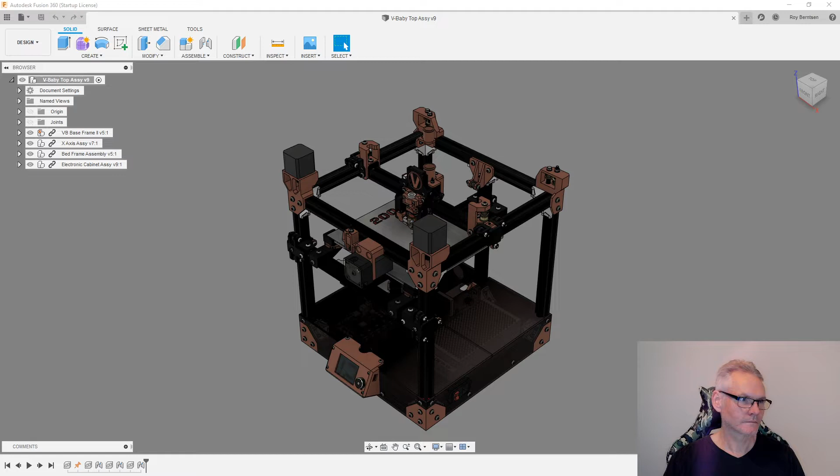Okay guys, the V-Baby squad.

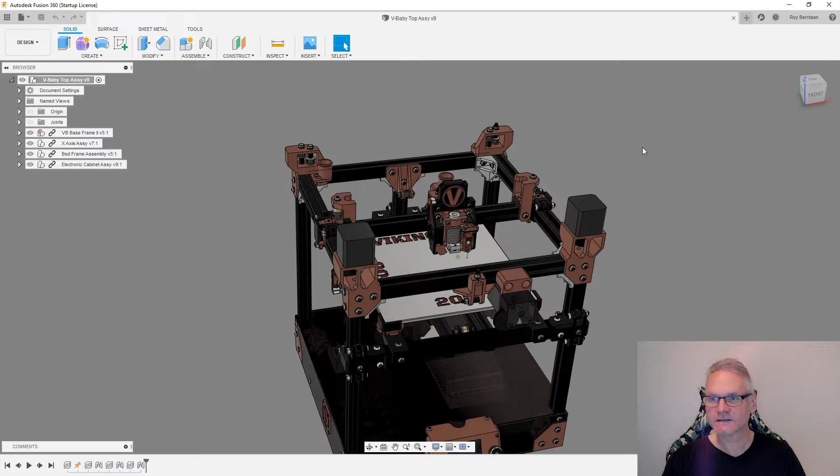Before I start the assembly video for the V-Baby, the X-axis, the X carrier and also the Y carriers, I will make some small changes to the layer fan shrouds. Just a small improvement, which one of you guys pointed out we could have.

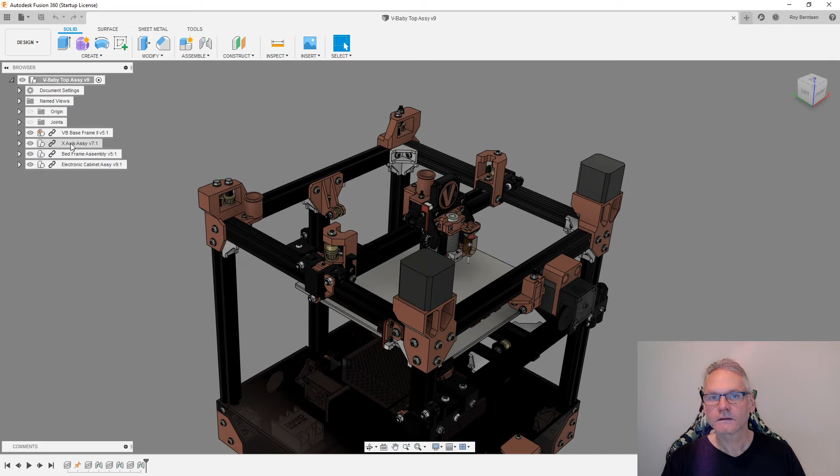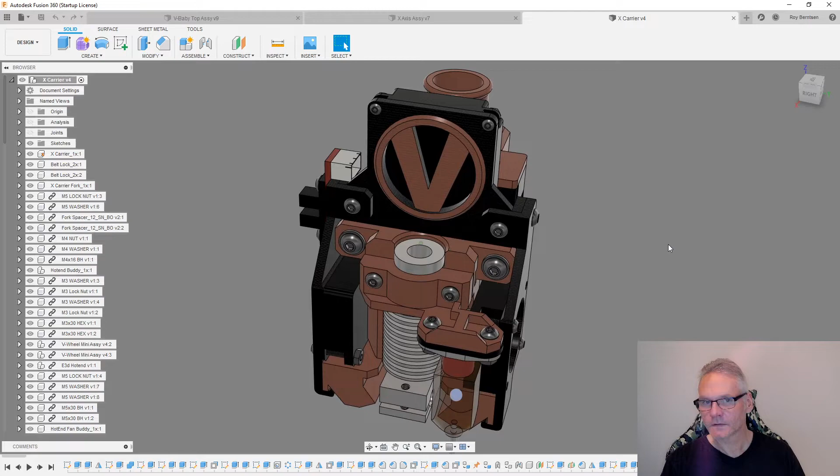I'm gonna show you, it's easier to show than to try to explain, so bear with me. I'm just gonna open the X-axis assembly, and then I'm gonna open the X carrier assembly, and I'm gonna work here.

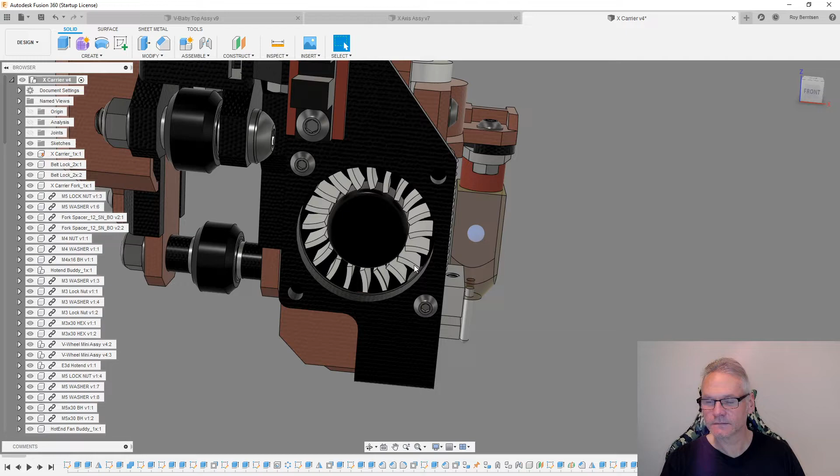What I want to do is add something here so we don't squeeze this fan when we mount it. Squeezing it will restrict the fan from spinning, so we don't want that. So I'm gonna add something here so we don't get any squeezing.

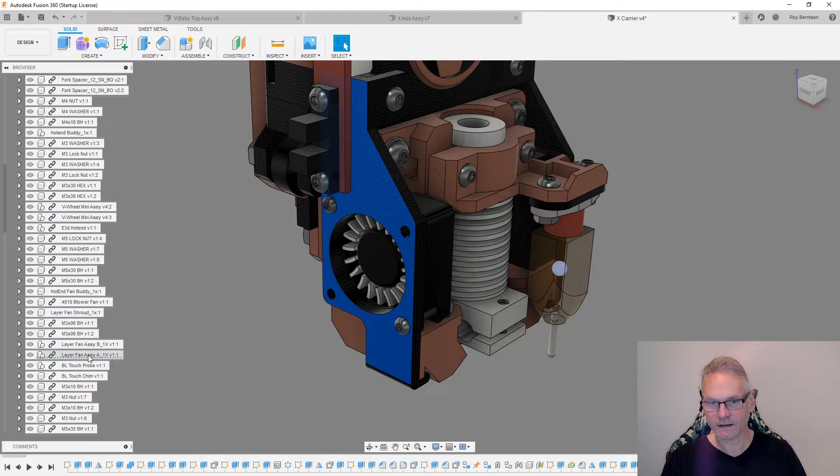I'm gonna find the fan shroud. So when I pick it with my mouse, you can see in the browser to the left it gets underlined, so then I know it's this guy, so I can open that one. So here it is with the fan and everything.

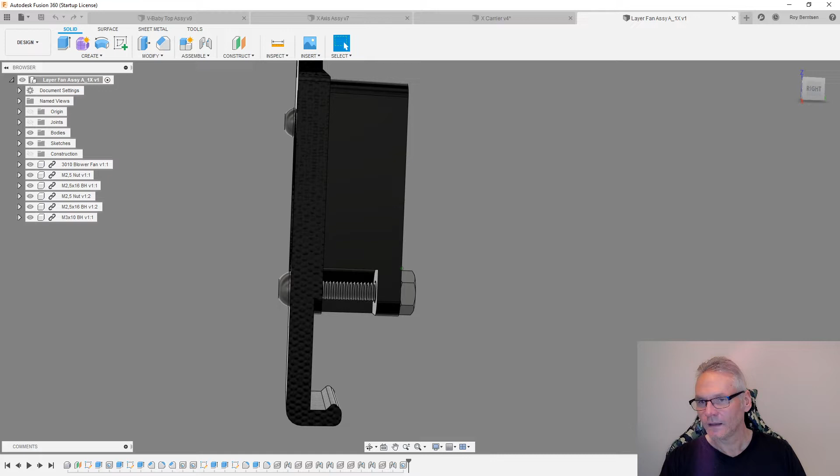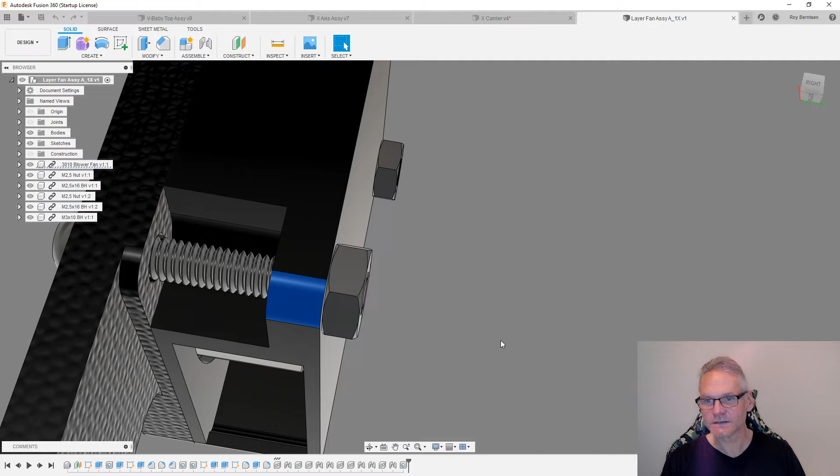Now I need to measure what we have from here to here. So we have 7mm, and I'm not sure 7mm is the right distance, because at this point I actually modeled these fans, and it's not certain that I made this part the right size. So I actually need to measure this to get it absolutely correct.

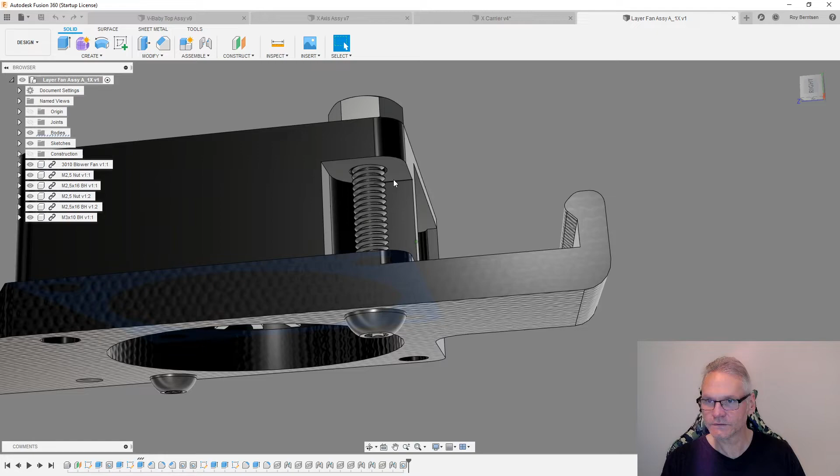But anyway, I'm gonna start adding, I'm not sure what I'm gonna call it, but something that's kind of a support which goes from here to here. We need that on both screws.

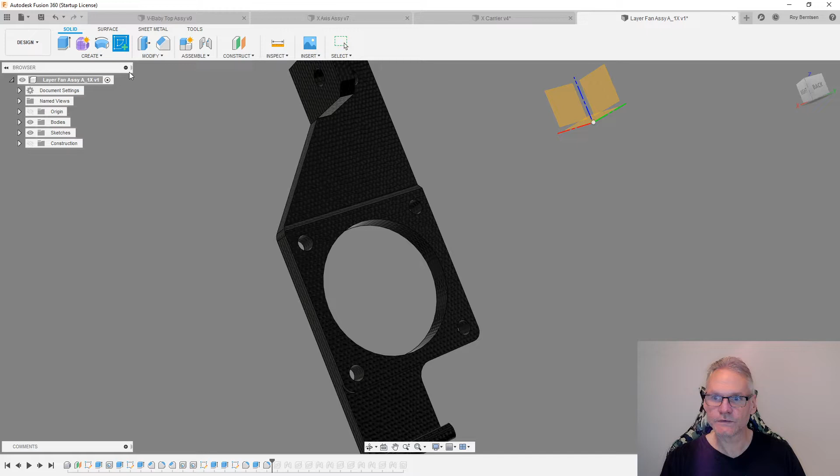I'm just gonna use my timeline and roll back in time, and I need one here and one here. The way I do it is I'm just gonna start a new sketch on this plane, and I want to project. I'm just gonna pick this circle and that circle, so I hit OK.

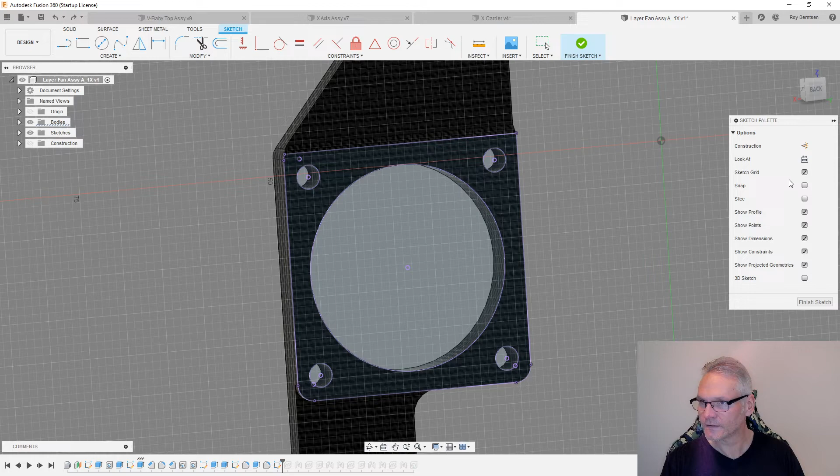Actually I want more, so I'm just gonna undo that and do another project and pick the plane so I get everything, which is nice.

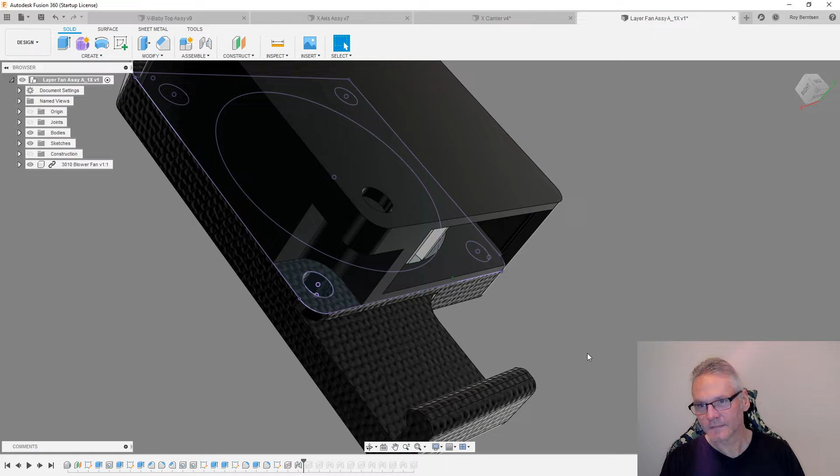I need to take a look at this now with the fan on. So here we have the fan. Let me see if I also can project something from the fan.

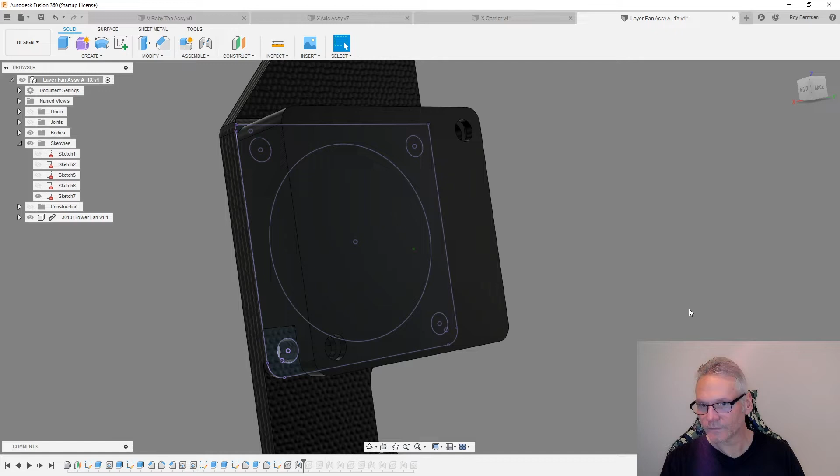I need to undo this because I started a new sketch. I don't want that, I want to do it in the same sketch actually. We cannot do that, so okay, let me move the sketch in my timeline.

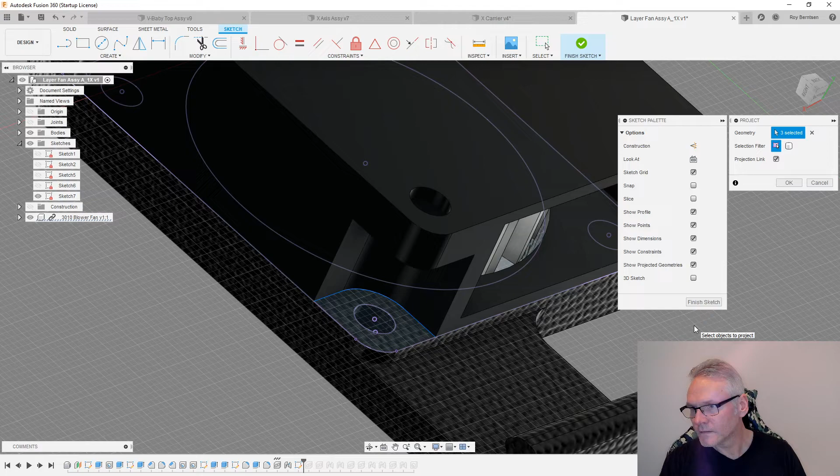I'm gonna pick it and just drag it to the right. Then we can edit the sketch with the fan inserted. So let me try to pick the edges here, also up here. And OK, then we can finish sketch.

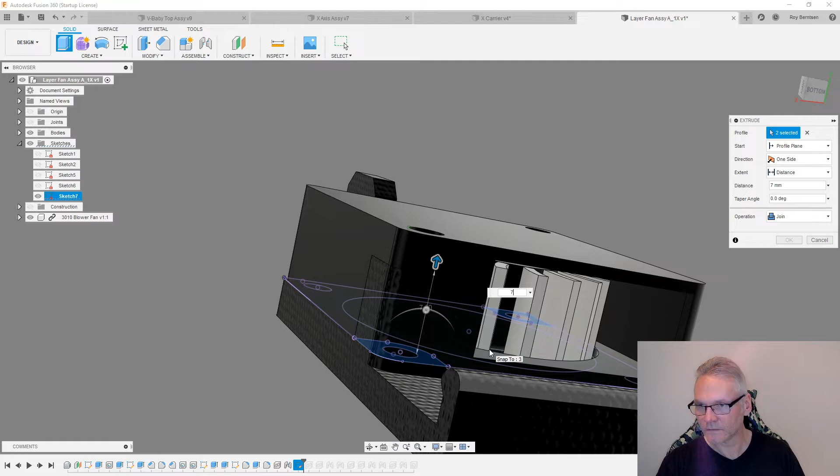So I'm gonna extrude, hit E on the keyboard, pick these guys, and we're gonna go 7, and it's gonna be join and OK. So if I now remove the fan, this is what it looks like.

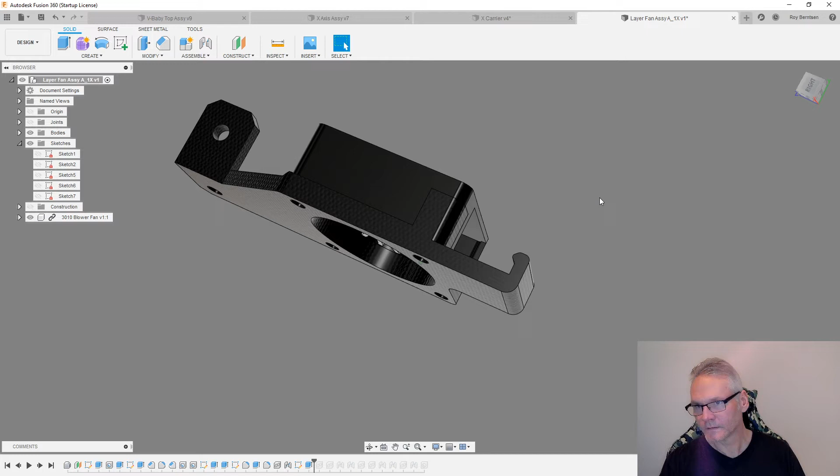So it's more easy for you to understand what I'm talking about with supports for the fan. This means when we add the screws and everything, we will not squeeze this guy so that it restricts the fan from spinning. That's very important, of course.

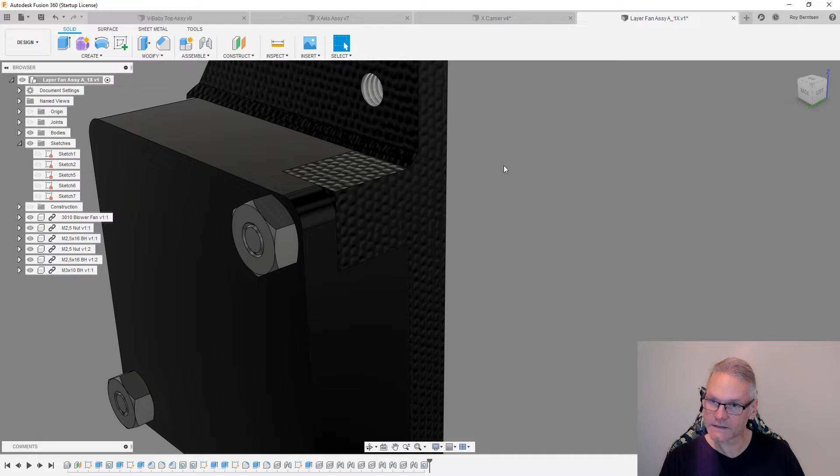So that's basically everything I wanted to do. I can see here that we have a sharp edge, we don't want that, so let me go back in time and make a fillet.

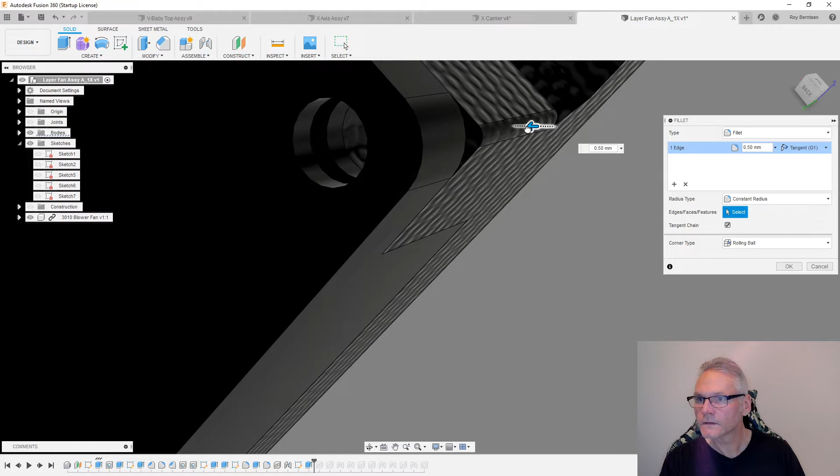Just gonna hit F on the keyboard. So this one already has a fillet, and this guy needs to go down 0.5 millimeters. This is what we want.

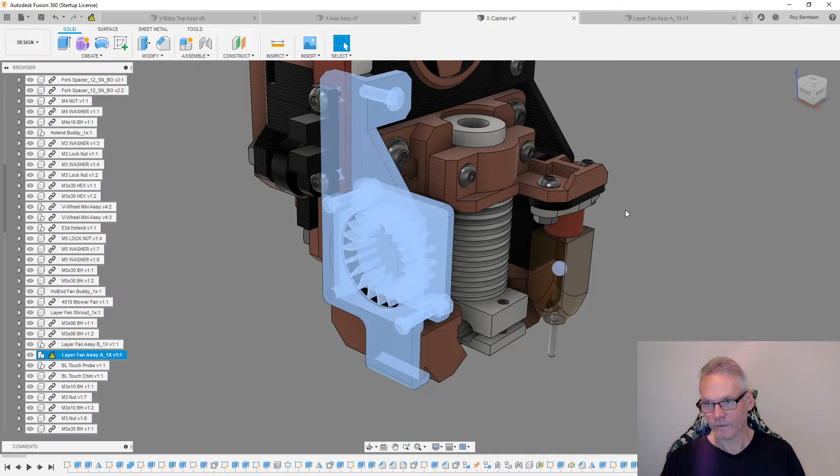Now we need to take a look in the main X carrier assembly to see if the new supports will crash with something else. As you can see here now in my browser on the left and also on the top here, there is a yellow sign, which means this has been edited and we need to get the latest version.

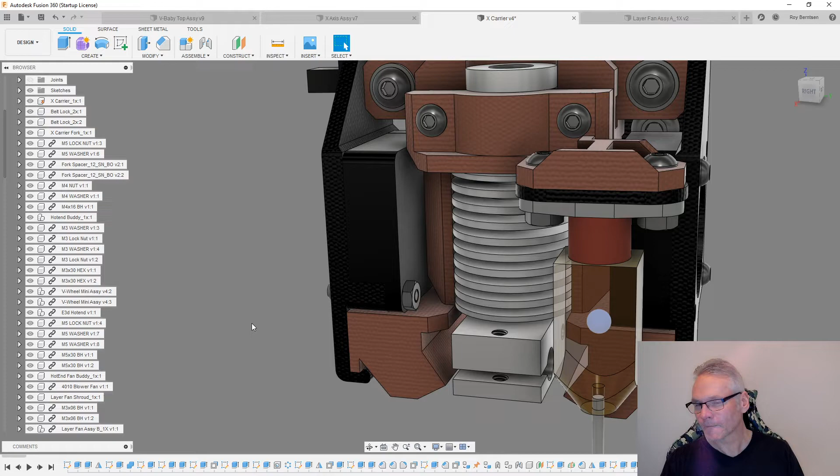So I'm just gonna hit get latest, and it's gonna update. So this is what we have now. Also on the back, it looks great actually.

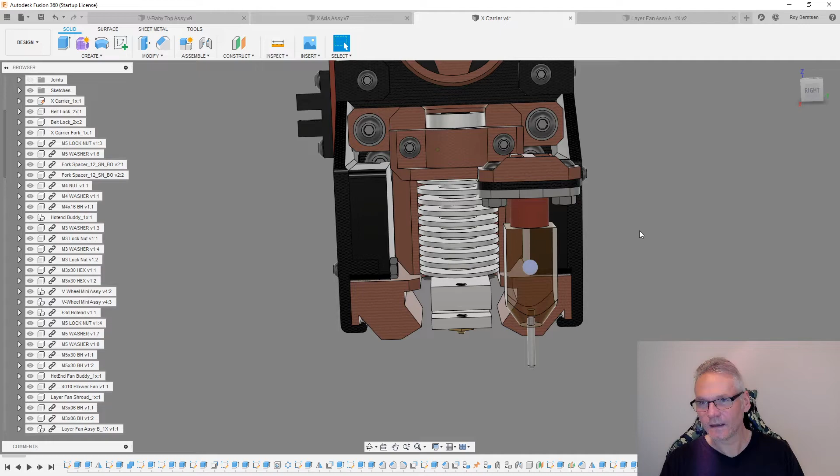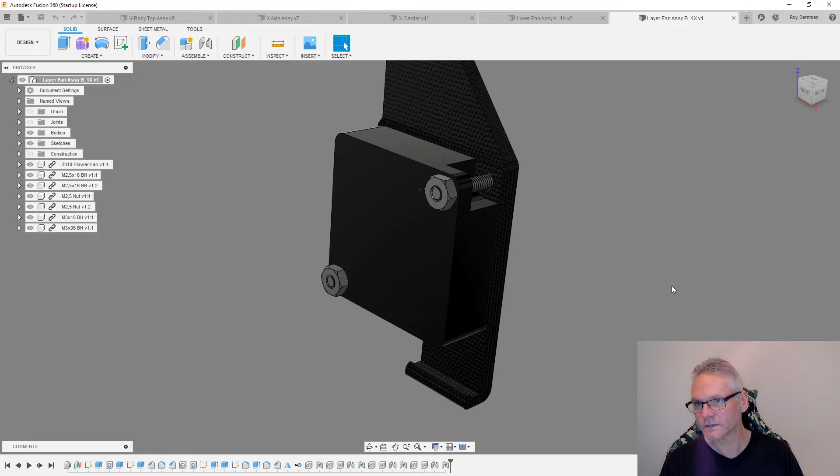So what I want to do at this point, rather than measure, I think I just want to print one and have a look, see if the fan actually fits before I do the other side. Actually, we can do the other side anyway right away, because we are going to have these supports. We might need to just do some small modifications.

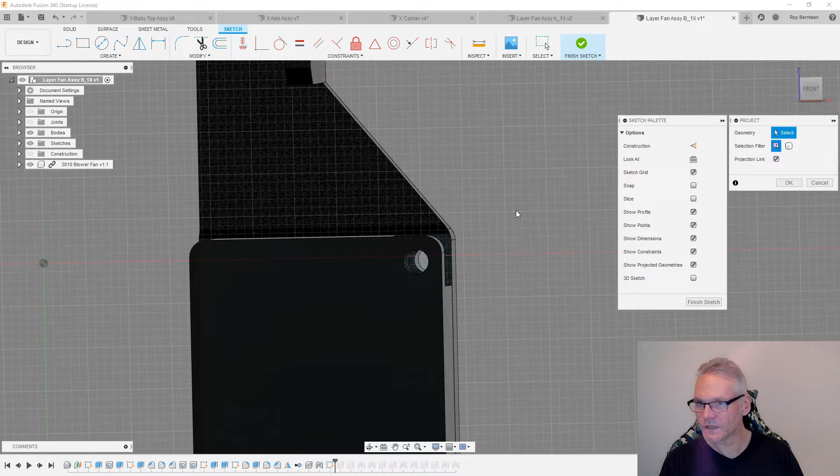So let me go back in time again. Let me just insert the fan. Let's create a sketch on this plane and hit P for project. Hit the plane and OK, and also need these lines.

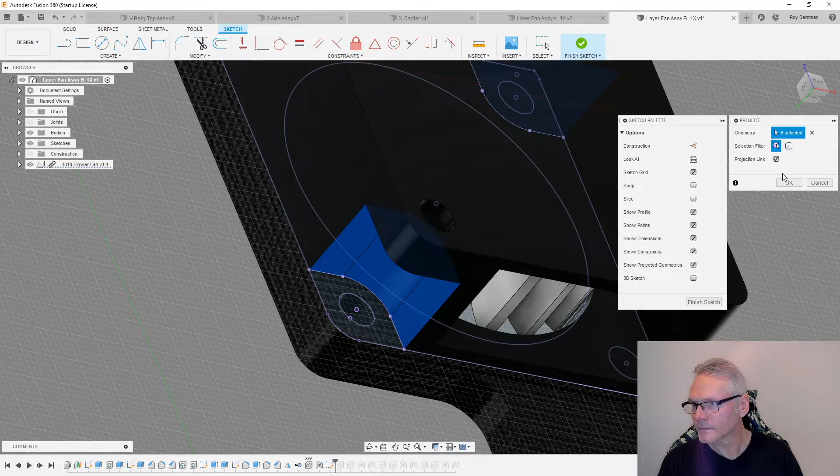And OK, finish sketch, extrude that guy and this guy, 7 millimeters, and we need to fillet this one. That's it.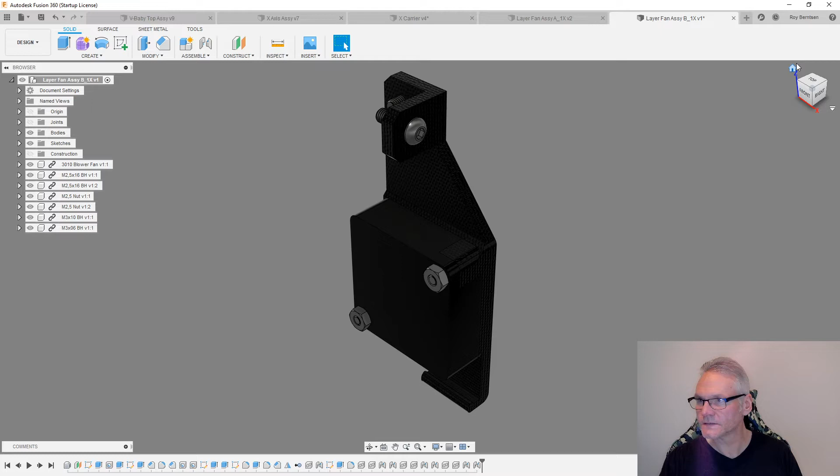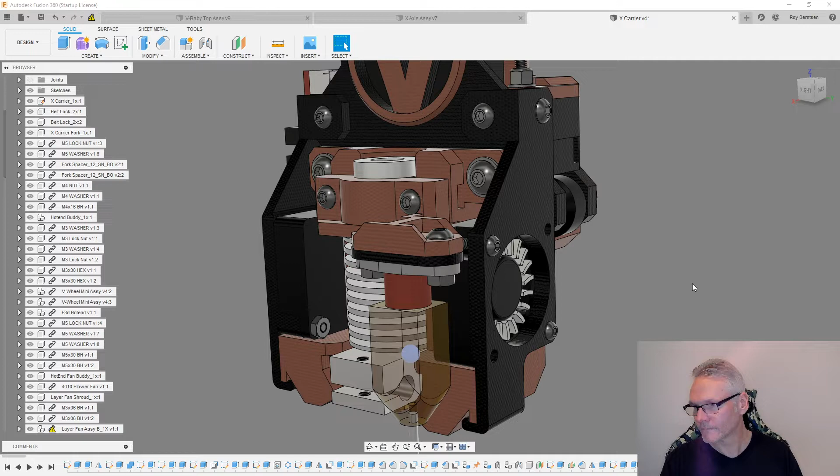Let's travel forward in time, insert all the nuts and bolts, and just save it. I'm just going to close it. It will save automatically, at least with my settings. And again, we get a warning because this guy is not updated, so hit the sign, get latest. And there we go.

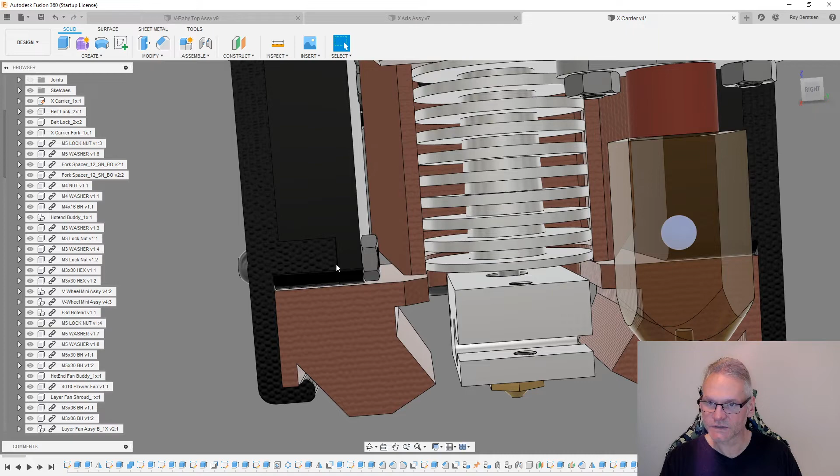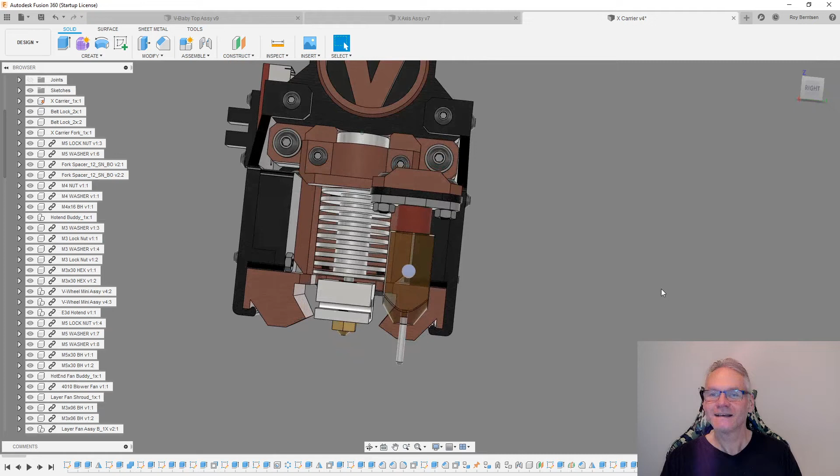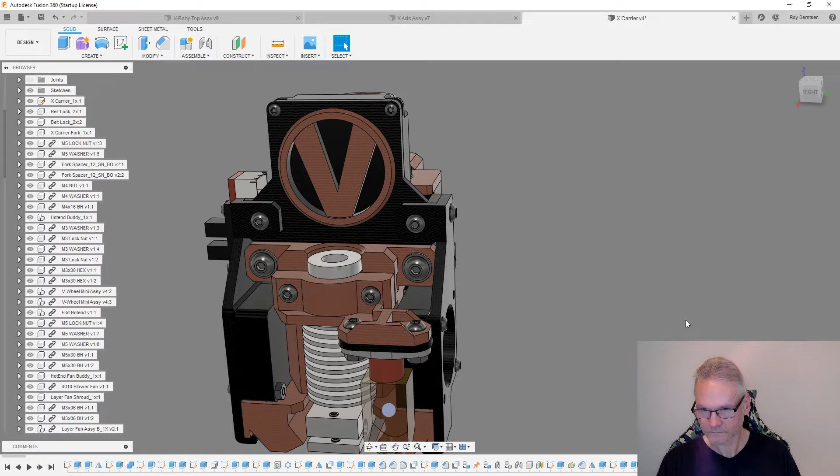The reason being... actually, no, that was not needed. I thought it was needed, but it's not. I was thinking about the direct drive, placing a direct drive here, but I think the actual direct drive will eventually be above these guys. So we don't need the space I was talking about, because a direct drive is typically 40 millimeters, and between the fans we only have like 38, I think.

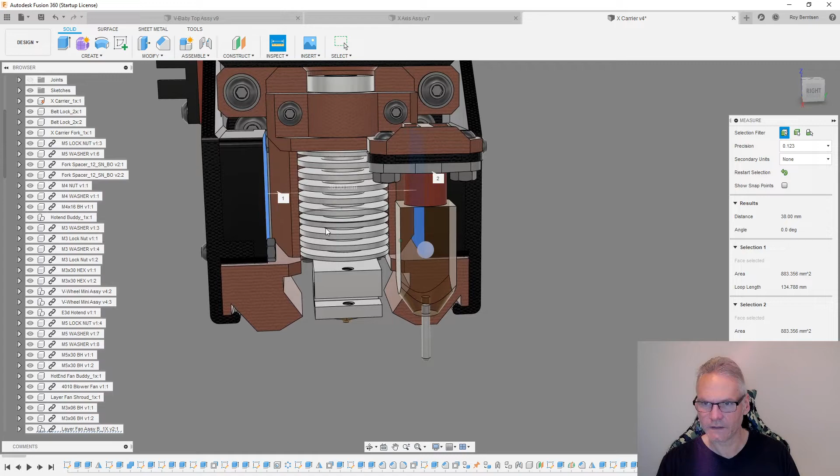Yeah, we have 38 millimeters between the fans, so we could not fit NEMA or a 40 millimeter something in here. But if that's necessary, we could just widen this bracket like 2 millimeters. But let's leave that for now, we're not gonna do that now. So I'm just gonna save this guy.

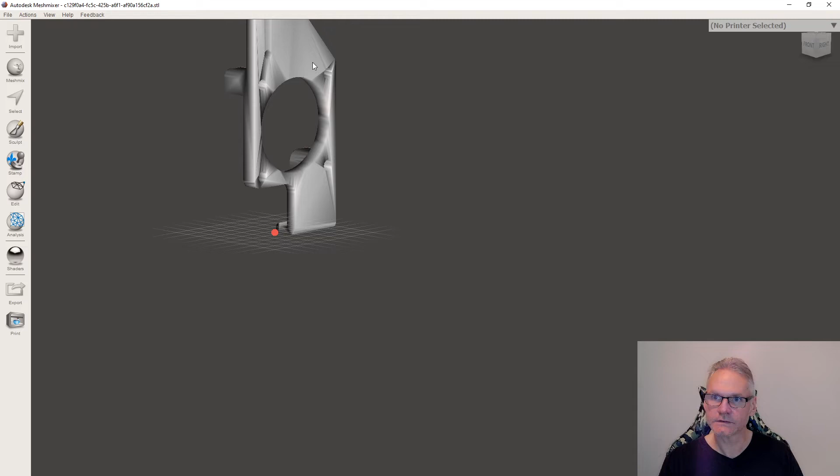Of course, we're gonna 3D print one of these guys. I'm gonna send it to Meshmixer first, and you can also see what I do in Meshmixer to turn these guys around. So I'm gonna do Edit and Transform.

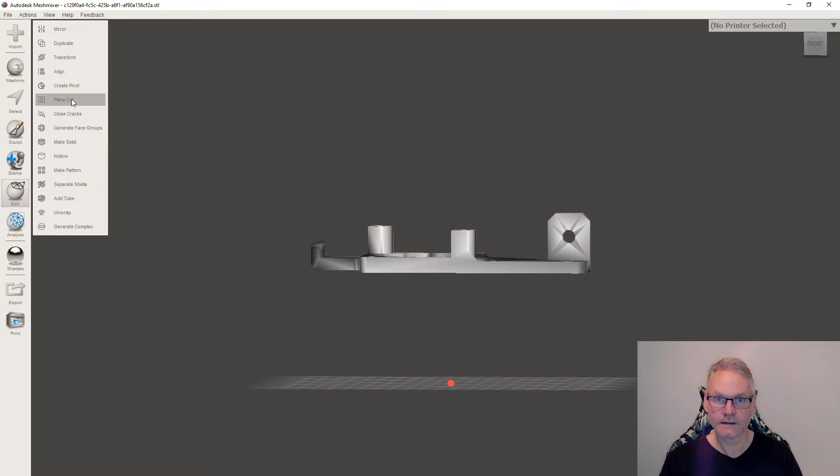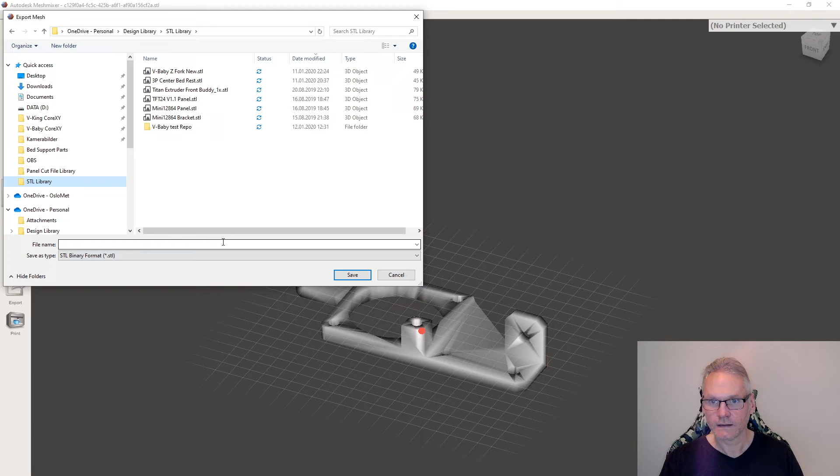And I pick this and drag the mouse out, so I hit this snap ring. I'm just gonna turn it 90 degrees and accept, and then do Align and accept, and then we can just export it to somewhere. I'm not gonna export it to the GitHub folder at this point because we need to test and see that it works. Just my STL library, and I'm just gonna put a layer fan body.

Body, one, support no, brim no. Save it. We can also do Cura,

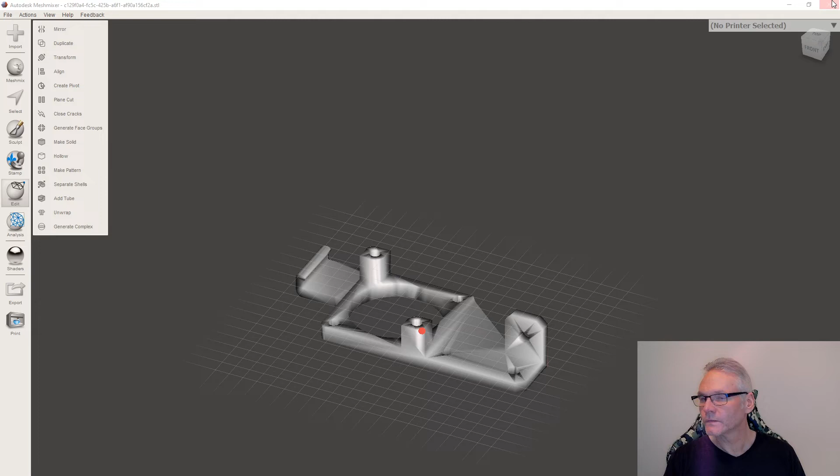so you can have a look at how I do this in Cura. I'm gonna start off my V-King. So I got the V-King running.

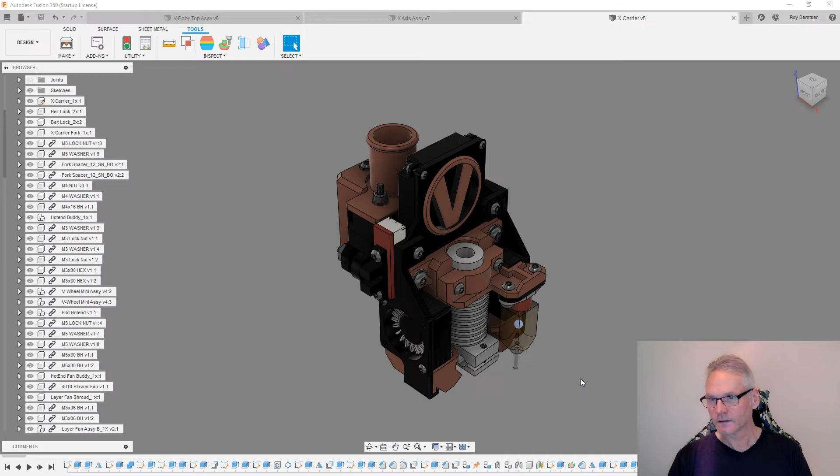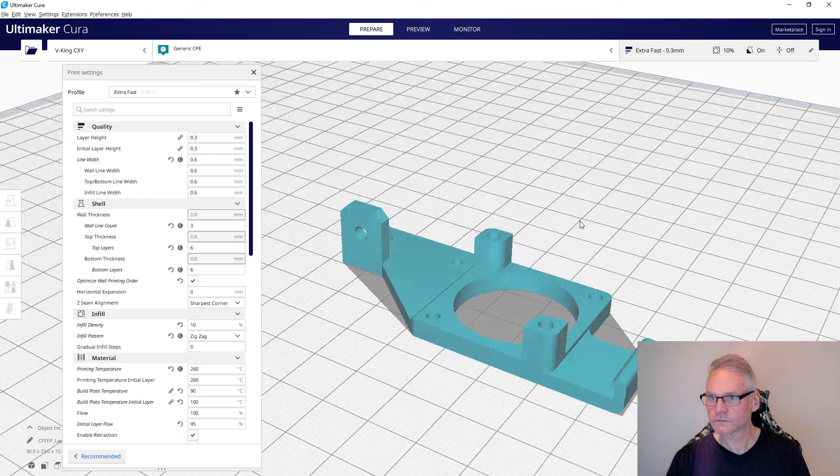So I'm just gonna print it at extra fast, it's fine, I'm not gonna bother with too many layers. Let's do 4 top layers and just 3 bottom layers. Wall line count should be 3, that's okay. And infill, we don't need much infill, let's just do 10% grid, it's fine.

Yeah, I'm printing CPE, that's what's on there, so I'm not bothered with changing that. So we're printing this at 100. Looks good, and turn off the support.

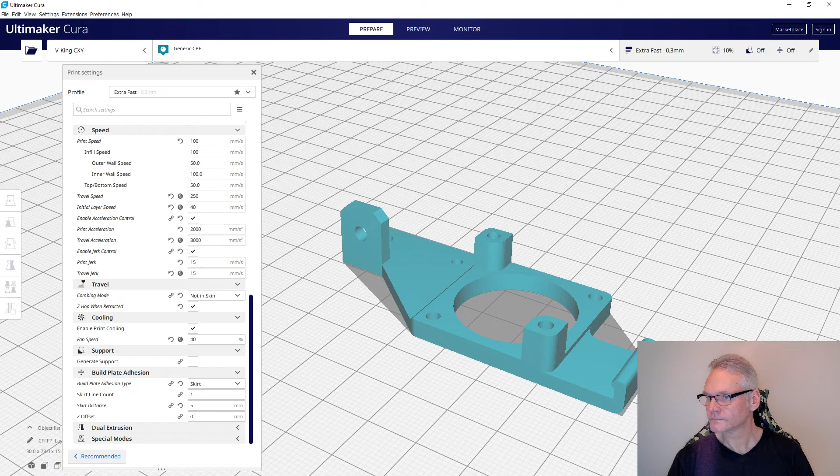Just gonna preview it, make sure it looks okay. Yeah, it looks okay. 40 minutes, that's perfect. So I can just send it to the V-King, which is running a Duet.

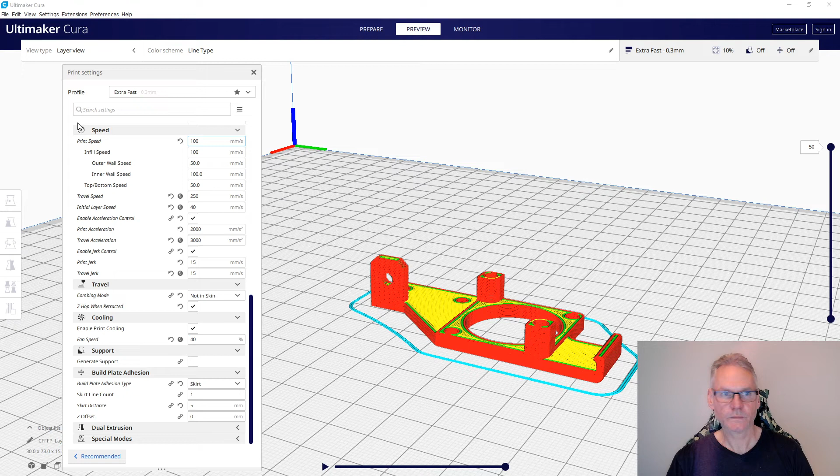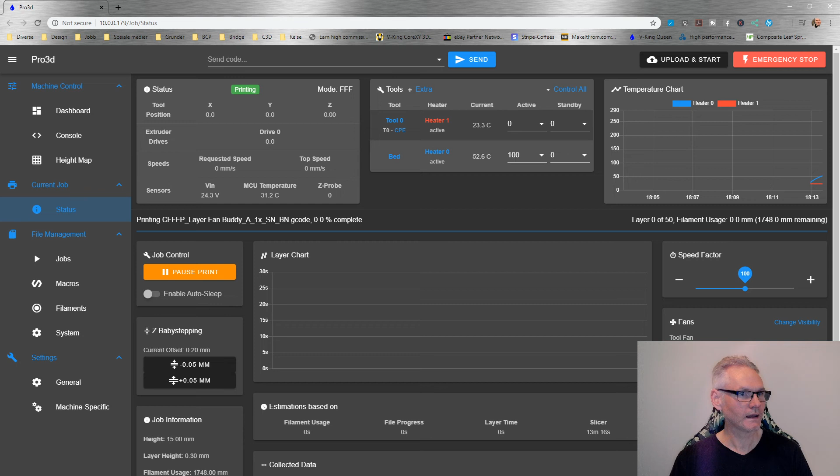Okay, yeah, that's it guys. That's actually everything. I can come back with the results, but that was just a quick live 3D modeling, slicing, and short video for you, so you can see what's going on at Valhalla.